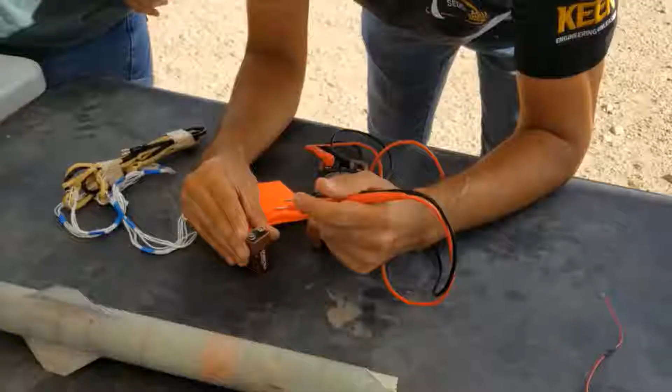Past two videos I showed you how to build a single stage rocket, which is what we have here, and in the last video we showed you how to do a dual deployment rocket. In this video we're going to do a little more of an advanced tutorial on how to do a multi-stage rocket, which if you're doing a SEDS University Student Rocketry competition, this is actually the competition guidelines: you have to do a multi-stage rocket and stay within the competition parameters.

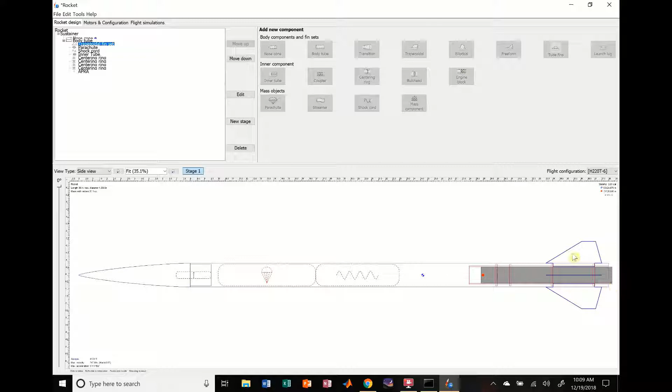So what I'm going to do is take the first rocket we built and just modify it a little bit to make it a multi-stage rocket. We're going to keep the single deployment here just for simplicity's sake, and we're going to modify it just a tiny bit. So you can see, typically when you have one of these rockets, you want to have a coupler inserted down here so that you can attach your two stages together.

So what I'm going to do real quick is change these fin tabs. I'm going to change the length to about 2 inches, and I'm going to change the position to be up a little bit more. Okay? And I'm also going to change this centering ring in the back here. I'm going to push it up a little bit. Okay? And so what that did is it basically gave us a little room down here so we could add a coupler.

And when you're designing your two-stage rockets, keep in mind how you're going to ignite the motors. I'm not going to show you that in OpenRocket today, but a typical configuration that we've used is we have the electronics bay somewhere up in this second stage with a wire that's routed down through the body here that actually connects into this second stage motor. This is really tricky when you're doing small diameter rockets like this because you don't have a lot of clearance to put that wire here.

If you're doing minimum diameter, where say you have a 29 millimeter motor and a 29 millimeter fiberglass tube, you have no room to run that wire. So you actually probably would have to go outside the body tube and come back and put it in here. And that gets tricky because you're going to have to mess around with your body tube and stuff like that. But what I'm going to do now is show you basically how to add a second stage.

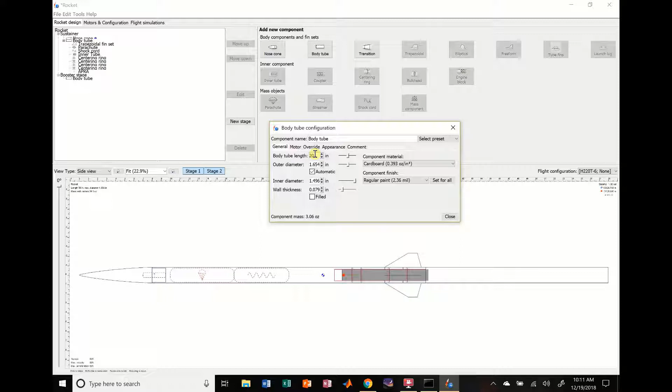So we go over here to this design tree, and you can see we have our move up, move down, edit, new stage, and delete. Obviously we're going to click new stage. And when I hit new stage, it pops up right here. It's typically called booster stage, so we're going to keep it like that for now. We're going to close this, and you see booster stage popped up. I'm going to go ahead and add a body tube, and I'm going to make this a 20-inch body tube for now. That's just a way for us to be able to add a couple components.

We are going to want to add a coupler. So we add a coupler. Right now it's at the bottom of the component. I'm going to change it to the top of the component, make this 0. And then we're going to double check the outer diameter, 38 millimeters, that's good. Inner diameter, 38 millimeters, that's not possible. We're going to change it to, not 26, why do I keep doing that? 36. So it'll fit inside of our rocket. Wall thickness should be automatically calculated, it should be 1 millimeter.

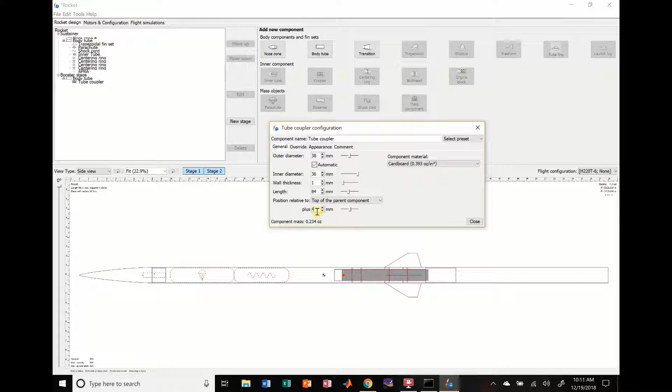Length, we're going to change the length to 84 millimeters. So now that's basically 2 diameters of the rocket. And we're going to change the position relative to this guy to 42 millimeters. I might have to do negative. Yeah, I've got to do a negative value. So negative value, you can see it goes up into the second stage. And something that's always useful to double check now that we have a second stage is, we have stages here.

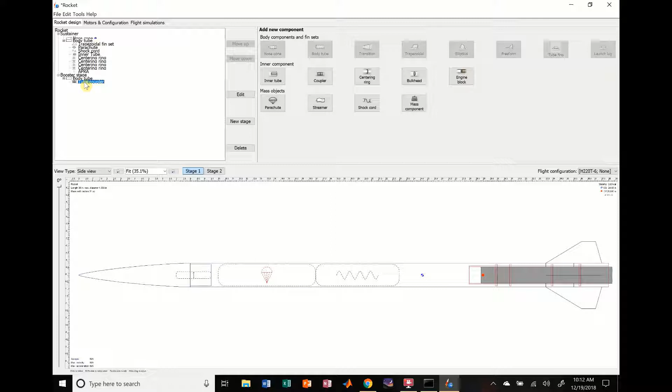So if I click second stage, it shows every stage above it, which can be a little frustrating if you just want to work with the first stage basically. If we hit the first stage, this top stage, you can see it pops up here. One thing to double check when you're doing this is make sure that when your coupler is here, when you click on first stage, the coupler is not attached. Because in how you're going to operate in real life when you launch this rocket, you don't want that coupler attached at all. And that's something that you'll have to double check. You can even see it in the design tree. You just want to make sure this coupler isn't attached to this stage.

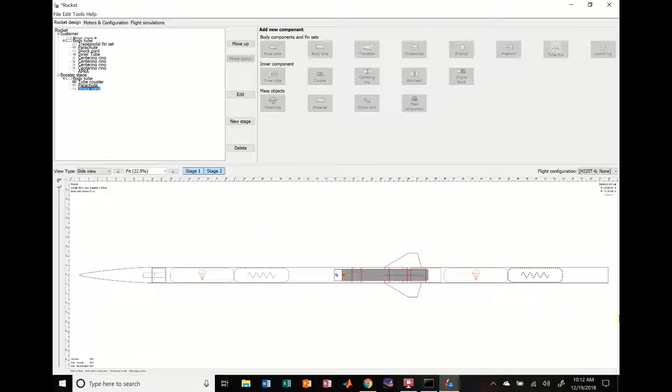Okay, so we have all this. What we're going to do now is I'm actually going to take this parachute. I'm going to copy this, and I'm going to paste it into this rocket right here. I'm going to copy the shock cord as well, just for simplicity, and paste it into this guy. So now we have a shock cord and our parachute, basically. And also, I'm going to increase the length of this, just so it'll be a little bit easier on me.

You can see when we did this, the stability went down because of your fins. OpenRocket sees it as a surface area, stability is calculated with surface area, and you have these fins way up here and you have this huge surface area, and it's going to make our stability go down. So if we were to launch the rocket right now, it would spin around and crash and burn. We don't want that to happen, and you're going to have to typically add fins, which you have to do basically 90% of the time unless you have a bunch of nose cone weight, which I've experimented around with, but it's much easier just to add fins.

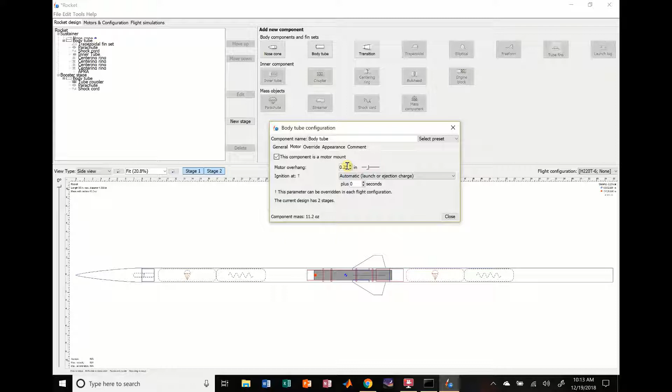So we're gonna make sure this is a fiberglass, and we're also gonna call this the motor mount. We're gonna do a 38 millimeter motor down here. Motor overhang, not hangover. We're gonna say a 1/4 inch. I think I have to say -1/4 inch, right? We'll see what happens. And let's see, we're gonna add some fins. Or actually, first let's add the motor. So you can see when we changed all that stuff, it changed our configurations automatically. So we have an inner tube now and a body tube. The inner tube is this tube right here. The body tube is going to be this guy down here.

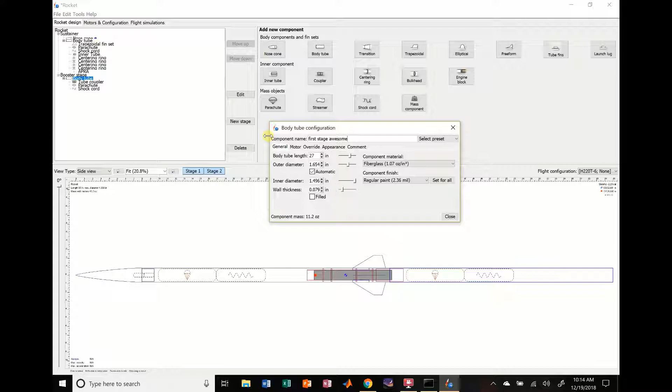And remember, you can rename these. You don't have to have it named body tube. If I wanted to change this body tube name, I could change it to first stage awesomeness, or just awesome. Like that. We're just gonna, whatever, call it that. That'll be fun. Well, I guess I misspoke. I guess I didn't change it here. I was kind of excited for that to happen.

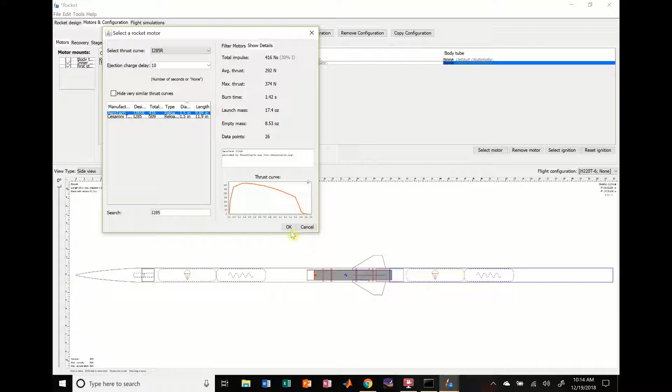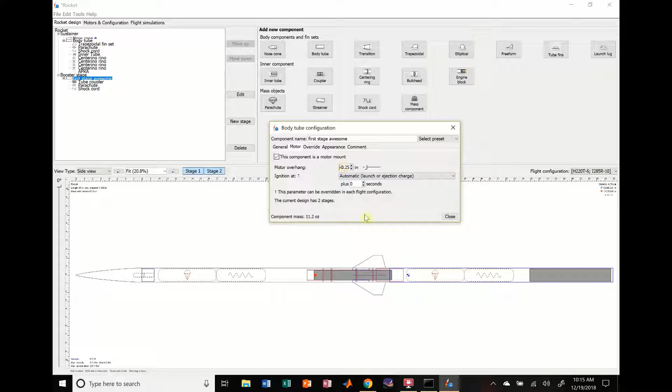But body tube is changed, and we're gonna go ahead and add an I-285 Red Line. And this is a configuration that we used in our very first rocket that actually won 2nd place in the nation for the USRC competition. And you can see I got the overhang wrong, so I'm gonna go back and change that. We did not do a 42 millimeter body tube. We actually did a 2.6 inch body tube, which granted wouldn't give us the maximum altitude, but because it was our first time doing it, we really wanted to make sure that we got it right. And so that's why we chose a larger body tube, so we have enough room to work with it.

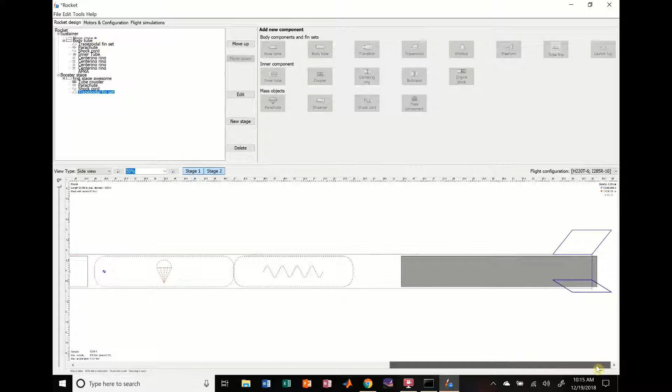All right, so we changed that, and you can see our stability factor is really bad now. It's -6, which is horrible. So what I'm gonna do is add some fins. And let me help you guys out by zooming in on this. We're gonna zoom in about 50%. And I'm gonna take these fins and increase the root chord to about right there. Make sure we have our fins lined up. So we had 4 fins on the upper stage, we want to have 4 fins on the lower stage. Or the first stage, second stage, whatever you want to call it.

Tip chord, let's say that's maybe 1.5 inches, why not? Height, we're gonna call it 2 inches. And sweep length.

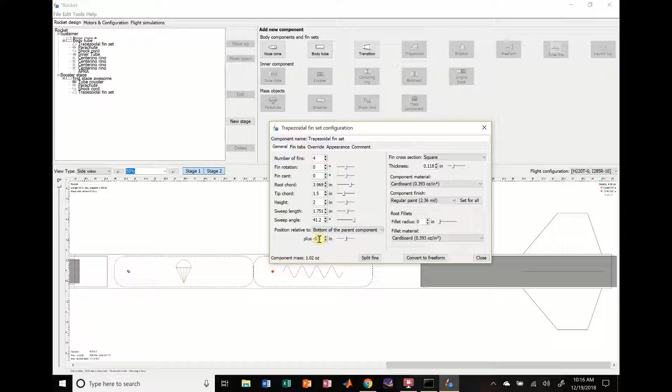Change it to something like that, and we're also going to change the position. Okay, we have to do a negative number. Okay. So this is now a 2-stage rocket. If I go to just fit, we can see how it looks. So here's our 2-stage rocket. We have a stage up here. We have a stage down here. We have 2 sets of fins. We have recovery for each stage.

First stage here, sometimes you can do a streamer if you really want to, because it's not going to be that heavy, and it might work out for you. We had a parachute in one of ours, and anyway, so you can see our stability factor is really high. It's at about 4.38. Now that's a stability factor for this entire rocket, and that's good to know because you want this stability factor to be high.

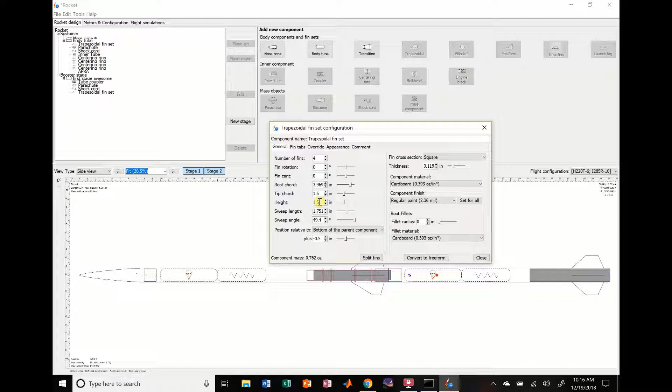We can change the height if we want. We can change it to 1 inch. See what happens. It's about -1 right now. We don't want that. We want to change it to about 1.5 or something like that. Have the same height as the previous stage. And stability factor of 2, which is pretty good.

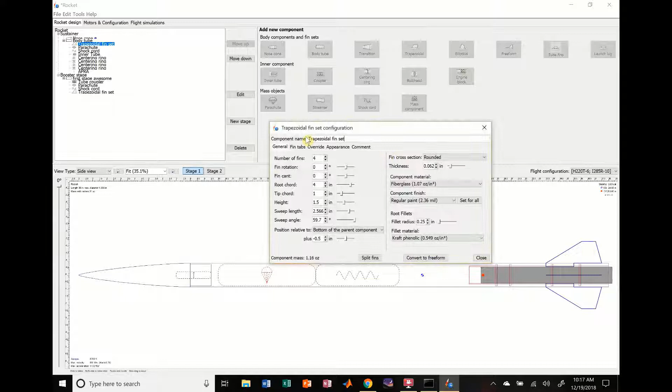And one thing you also want to double check when you're designing is that, after your initial entire launch vehicle, all the stages after that are stable as well, or at least going to be stable in flight. So you might be going at 400 feet per second, and that might cause your rocket to be unstable in flight, but you want to double check in here and also double check with simulations. So you can see we're pretty stable right here. I'm gonna actually change this to about 1.25. So everything looks good for now.

Now what we have to double check is our parachute in here. We want to make sure that's deploying at a correct stage or a correct point. So it's at apogee. That's really good. That's what we want to have happen. And this one, this parachute, I think I did not change it from the previous one. No, it's at apogee. Okay. And so everything's deploying at apogee of their individual stage. So this stage,

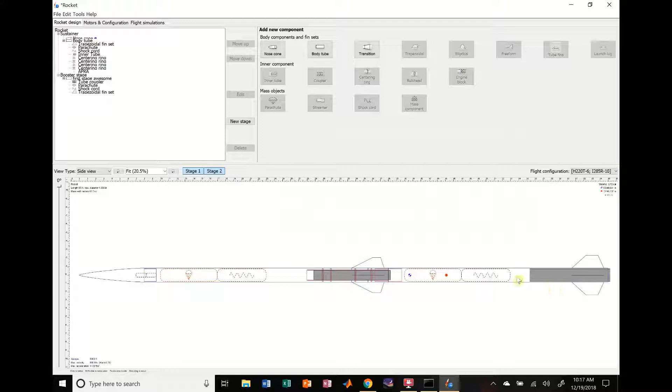OpenRocket, as far as I've been able to tell, simulates these as being a drag release. You don't have to tell this stage to separate. As soon as this motor burns out, your rocket stage will separate because it'll have more drag, it'll pull it out, because this should be just a friction fit, and it should be loose enough where you could pick up your rocket and this stage should fall out. So after you're done having the force that's pushing it up, the drag is going to pull it down basically.

And it'll come down and continue on its ballistic path before this parachute ejects. And we typically, depending on what we're doing, just have the ejection charge from this stage shoot out the parachute. And you might have to mess around with the delay on that to make sure it's going to go out on apogee. Okay, so what we're also going to do now is the trickier part of this.

If we just go to flight simulations, we don't care about anything else right now. Let's go to simulate and plot, and let's just see what happens. I'm going to choose some interesting stuff right here. Launch rod clearance, ejection charge, stage separation. We want that. Apogee, recovery device deployment, ground hit, simulation end. Okay, that all sounds good. So we hit plot, and you can see that our altitude has increased significantly from just our single stage rocket, which should happen. Rocket goes up.

You can see that we have motor ignition and stage separation right here. And then you have motor burnout of the second stage in this line, and then you have apogee device deployment for this first stage, and then apogee deployment of the parachute and the second stage. We're going to double check this guy right here. This is an interesting one. It's motor ignition, stage separation.

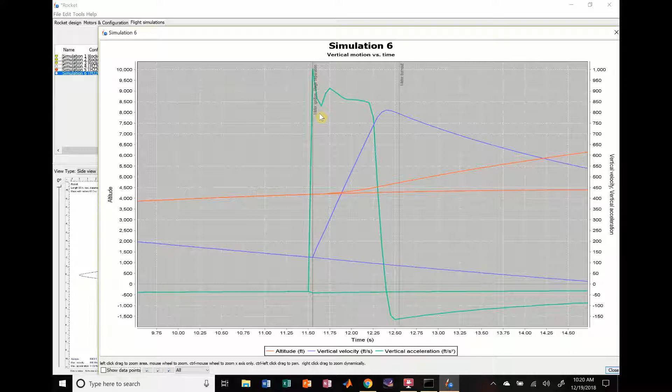That's pretty interesting. So maybe I'm incorrect. It's possible that the stages stay together until motor ignition, but we're going to double check that. So you can see you have your simulation here. What we're also going to look at is motors.

So this one, if we look at the ignition, we're going to select ignition, and let's see, it's automatic launch or ejection charge, but we don't want that. We want to have it set at the first burnout of previous stage. If we have it set at that, let's go back to our flight simulation and see what happens.

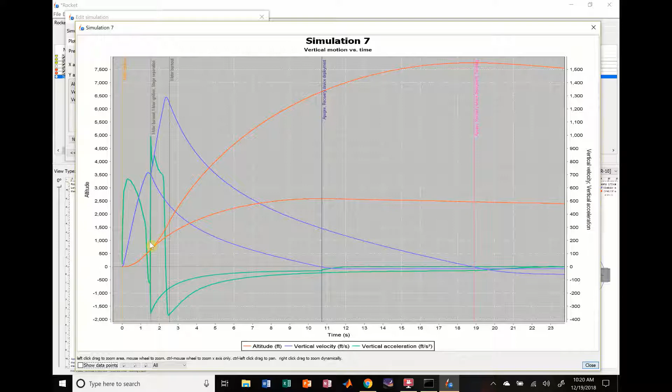So you can see our altitude's decreased a lot because immediately after this first stage burned out, we started our second stage motor. That's not typically what you want to do. It's up to you, but OpenRocket simulates as soon as that one burns out, it's ready to go. Typically your motor will take a little while to light, maybe half a second or something like that.

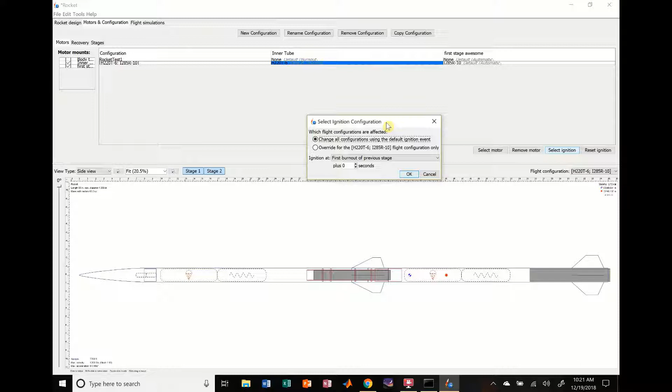But you also want to try to change the motor ignition to allow yourself to coast a little bit, which will allow you to gain a little bit more altitude. But you have to be careful because if you let it coast for too long, your rocket might approach apogee and actually start turning sideways, which will lose altitude. If your rocket's exactly at apogee and you try to ignite it then, it might shoot straight into the ground, which would be really bad.

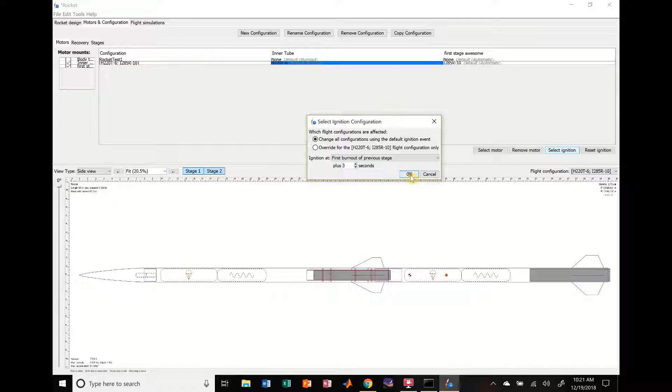But we're going to add a couple seconds here. We're going to add like 3 seconds, see what happens. And double check our apogee right now. It's 7,799 feet. We're going to hit OK, and you can see our apogee increased, which is good.

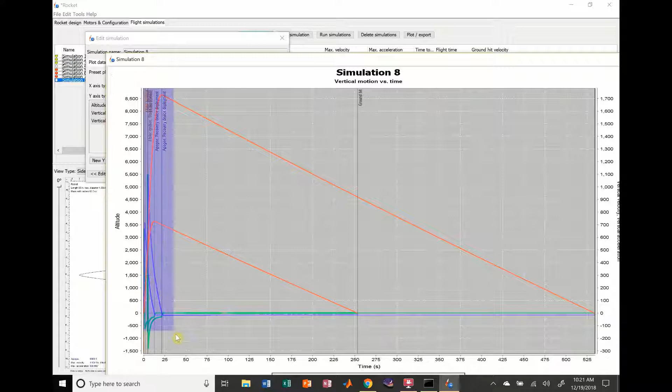If we go to our flight simulation, hit new simulation, and we hit plot, check out what happened. You can see our apogee increased because we had motor burnout, and then right here is where stage separation occurs and motor ignition, and it burns all the way up here. And so that's something you're going to have to mess around with.

You're going to have to change the delay on your second stage motor ignition to figure out what you're comfortable with, how long it'll take basically for that second stage motor to ignite, and how long you think is appropriate to make sure your rocket's pointed straight up still and not pointed sideways or towards the ground, which would be really bad because you're going to lose a lot of altitude that way.

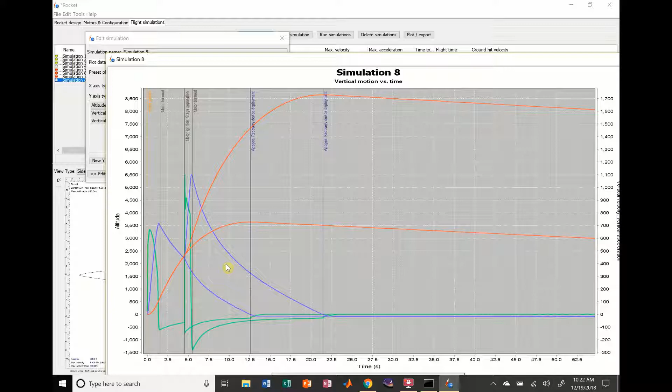One thing we would always suggest is to have some sort of tilt control on whatever your electronics are for the second stage. That way, if your rocket's tilted too far, it's not going to ignite, which is really good. So say if your rocket's tilted at like 30 degrees down or something like that, it won't ignite, which is really good because that's pretty safe. It'll also prevent you from hurting anyone basically. But you always want to make sure your rocket's still pointed straight up.

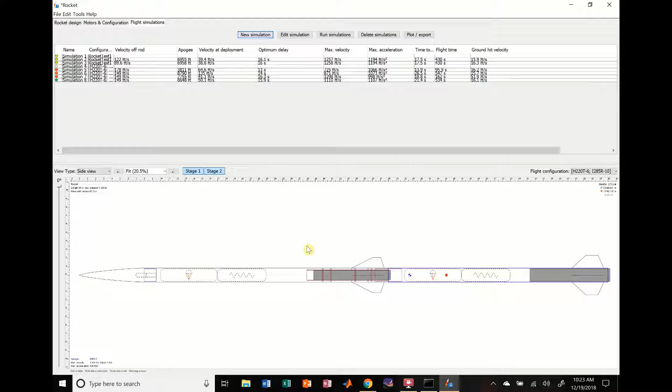So that's just kind of our little tutorial on two-stage rockets here. Let's see, we're hitting about Mach 1, which is good. You can always double check what speed your rocket's going at when you have device deployment, when your stages are going to separate. And you can see this is probably not an ideal rocket, or it might not be how you're going to design it, because this is a really big stage. You might not need this much room for a parachute.

But that's up to you. You're able to mess around with it. You're able to add avionics to it. You're able to add flight computers, check out the individual stages, as well as add trackers to it. That's something that's going to be really important. If your rocket's going to go really high, we usually try to put a GPS tracker in it so you don't lose your potentially $1,000 rocket, which would be really bad. But this is how we do two-stage rockets.

The next tutorial is going to be on some more advanced functions of OpenRocket, stuff that we typically use as advertisement. We make pictures out of it, as well as some of the different tools you can use on OpenRocket to improve your designs. So please check out the next video in this series.